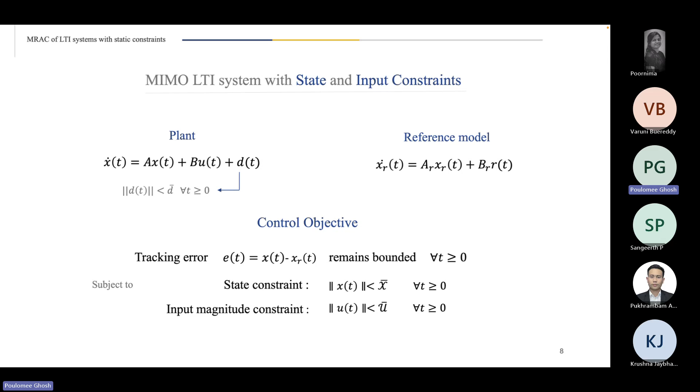Now we are assuming that the controller parameters kx and kr are bounded by kx bar and kr bar, and these are assumed to be known. This might sound conservative because we're claiming we don't know the uncertainty but know its bound, but there can be ways in real systems to know some conservative upper bound of kx bar and kr bar. We won't use these bounds in the control law itself, only in the feasibility condition, so the control law won't be conservative like robust control methods.

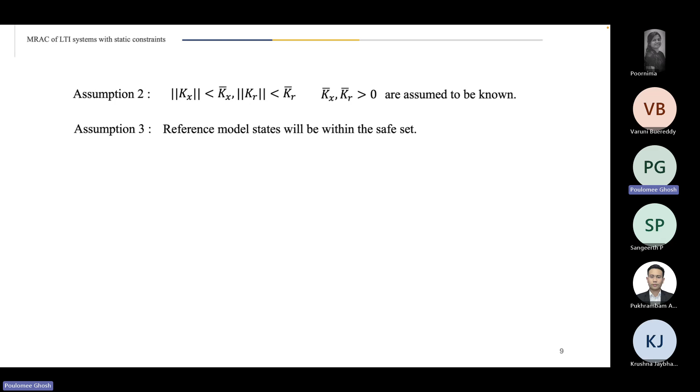Another standard assumption we make is that the reference model states will be within the safe set. That is, the reference which we want to track will also be within the safe set we are defining. So provided the norm of XR(T) is within XR bar, and here XR bar is assumed to be known.

The next assumption is that initially the error will be within the safe set. This is also a standard assumption for Barrier-Lyapunov functions or any safety certificates like CBF. We have to start within the safe set to guarantee the forward invariance of the set.

Is R of T ensuring invariance of the state, the reference model? Yes, reference. Yes, so we are assuming the reference R of T will be such that the reference model will be inside the safe set. The reference model state. So this assumption will be satisfied.

Now, provided this assumption, we can translate our constraints on the plant state to constraints on the tracking error. If our reference model is bounded by this smaller region XR bar, and we want to bound our plant state within X bar, then if we can guarantee the error will be within xi, where xi is the difference between X bar minus XR bar, then satisfying the error constraint automatically implies the state constraint is met, because my reference is always within my safe set.

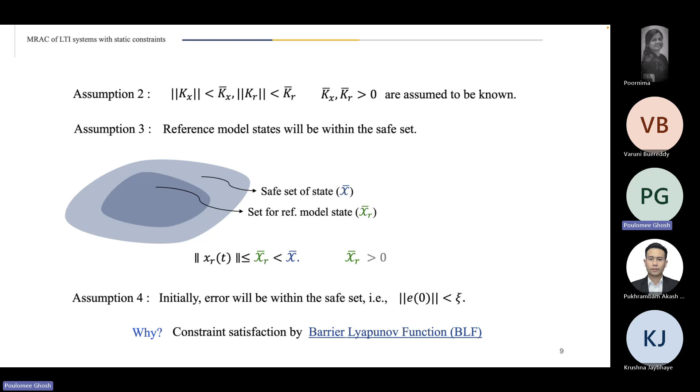Now, how does the Barrier-Lyapunov function handle constraints? It is basically a Lyapunov-like function which is zero at the origin and positive definite. As the constrained state approaches the boundary of the safe set, you can see from this expression the Barrier-Lyapunov function will approach infinity. So if we start within the safe set, which was our assumption, and if we can prove that V dot is bounded, that means V never blows up, which means our constraints are satisfied for all time.

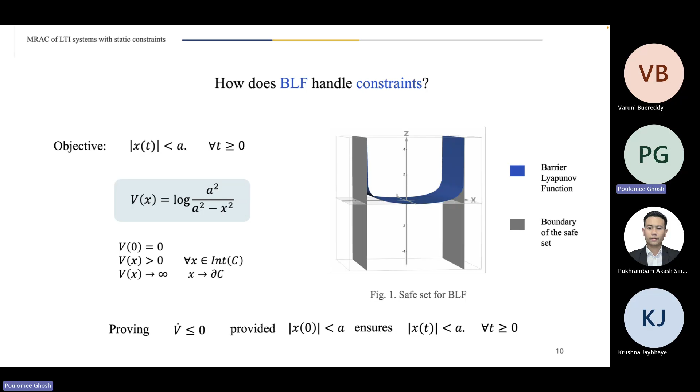So we used the BLF, which we will show later, for state constraint satisfaction. For input constraint satisfaction, we have used a saturated feedback controller. The auxiliary control input V(T) - earlier in classical MRAC we had used U(T) in this structure. Here we have considered an auxiliary control input V(T) and used a saturated feedback law such that the norm of u(t) will be within u bar, so the input constraints will be met for all time.

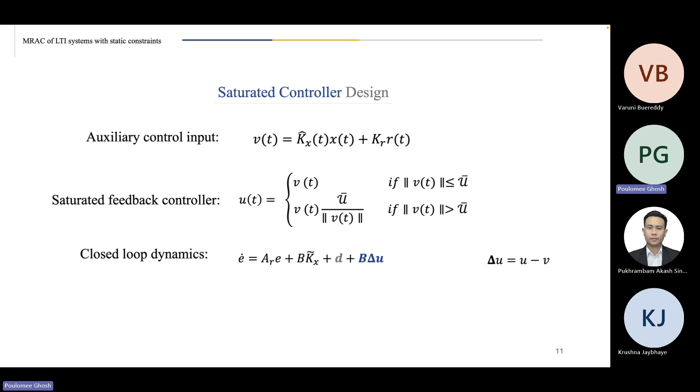But to do that, our closed loop dynamics, which earlier had only two terms, will now add two extra terms. One is D, coming due to the disturbance. Another is B delta U, coming due to the input saturation or saturation error, where delta U is the difference between U and V. So now how do we deal with this B delta U term in the Lyapunov analysis? We can consider it as a disturbance, and to mitigate its effect we need to know the bound of delta U.

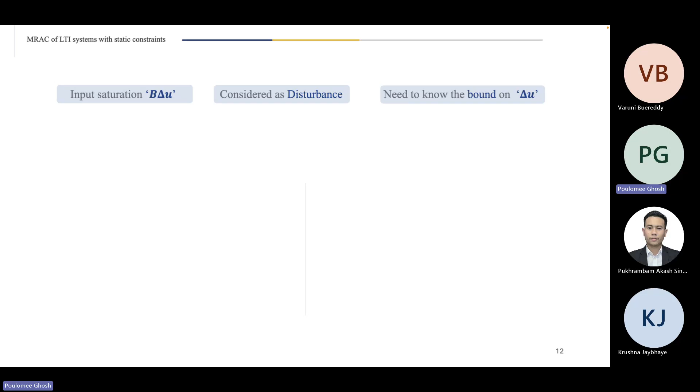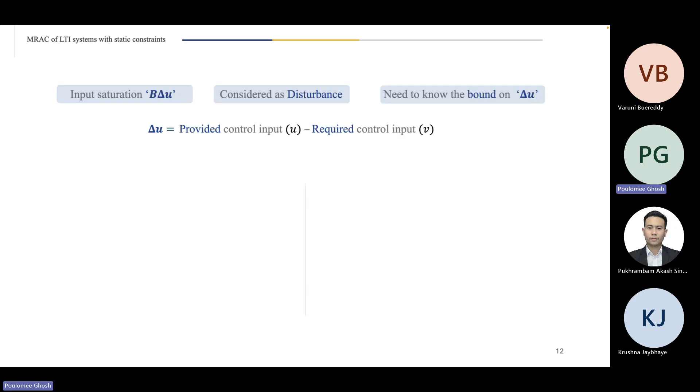So what is delta U? It is basically the difference between the provided control effort, meaning the actuator limit you have, minus a required control input, which we need to satisfy our control objective.

So there can be two cases where the required control input is less than the provided control input. There we don't have any problem. Delta U is equal to 0 and input constraint is always met.

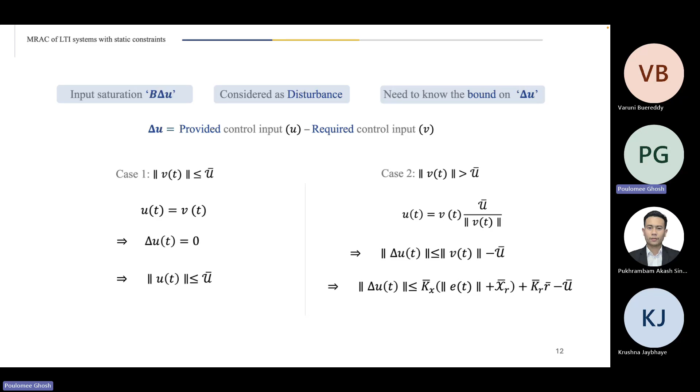So in the Lyapunov analysis, earlier we only had E transpose PE in the classical MRAC. Now instead of that, we are using a Barrier Lyapunov function. The Barrier Lyapunov function will deal with the state constraint. You can see here we have considered BLF on the error instead of state. So if the error constraint is met, we can prove that eventually the state constraint will also be met.

So in the Lyapunov analysis, again, we are having these terms B delta U and D.

So if you have this adaptive update law, we have used the projection-based adaptive update law such that the norm of Kx hat will be bounded within a compact and convex set, which is Kx bar. That is why we required that assumption that the actual controller parameter Kx is bounded and the bound is known, so that we can bound this Kx hat.

It is a disturbance. Yeah.

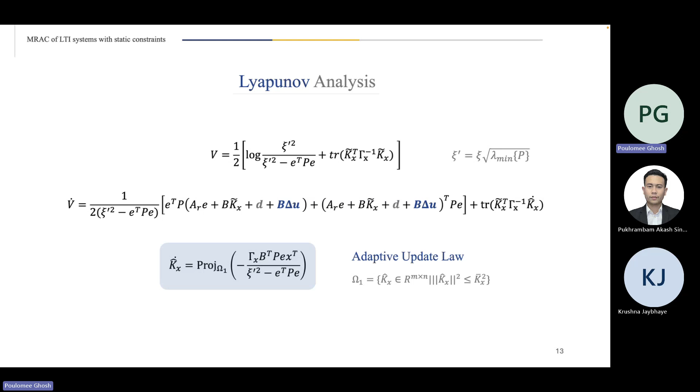So we have employed the adaptive update law and we have considered case 2 where delta U has a non-zero value. And we can prove that V dot will have this structure.

So now you can see if this highlighted region is positive, then we can get a negative semi-definite result. From there, we will have a feasibility condition which we need to meet.

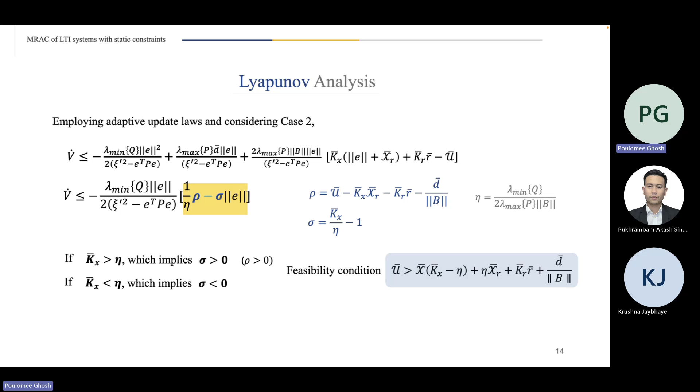So I have analyzed how this feasibility condition is coming. So basically, you can see for all cases, if this main feasibility condition is satisfied, then we can prove that V dot is negative semi-definite. I'm not going into the details of this analysis.

So you can see this is our main feasibility condition, which is a sufficient condition. That's why it might be conservative because it has this Kx bar term, which can be conservative.

So this feasibility condition is offline verifiable. We can know a priori whether our control has enough control authority to meet the state constraints and deal with the disturbances and parametric uncertainties. So it also establishes a nice relation between U bar, X bar, D bar, XR bar. So yeah.

So yeah, sir, Kx bar and Kr bar are in our hand, but the true Kx we don't know, right? So Kx bar can be a conservative upper bound of Kx. So if Kx bar value is very high, this lower bound will be very high.

That is why this feasibility condition is a sufficient condition. But since we can guarantee a priori and offline, that is the trade-off of this feasibility condition. So we are now working on how to reduce the conservatism of this condition.

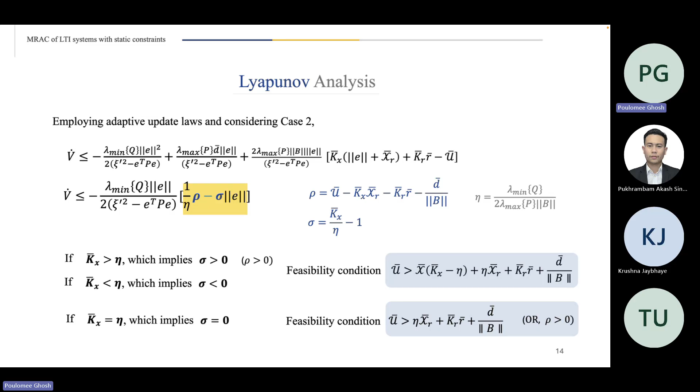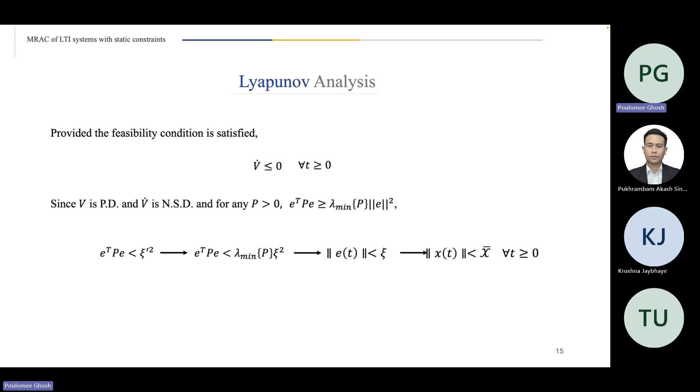So provided the feasibility condition is satisfied, we can prove a negative semi-definite result. And as I have discussed earlier, how we can guarantee from the error constraint satisfaction, we can guarantee the state constraints are eventually satisfied for all time.

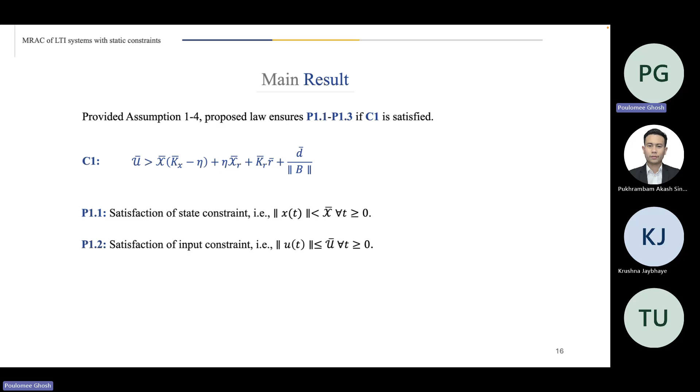So the summary of the result is, provided the assumptions hold, the proposed law ensures the state and input constraint satisfaction, and all the closed loop signals remain bounded if this offline verifiable feasibility condition is satisfied.

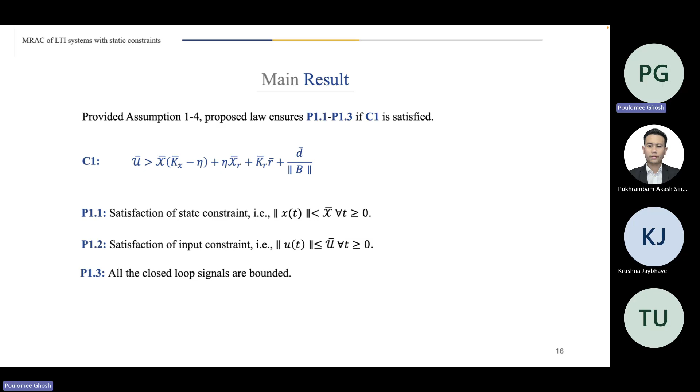Here is a small insight about the feasibility condition: if we see the feasibility condition, it is in the form U bar equals alpha 0 x bar plus beta 0. Beta 0 is always positive and alpha 0 can be positive or negative. Alpha 0 was basically Kx bar minus eta term. So we don't know the sign of alpha 0 beforehand.

Basically, U bar will have a larger lower bound. And the feasibility region will depend on the sign of alpha. If alpha is positive, the feasibility region will be smaller than if alpha is negative. Alpha negative means this term is more than kx bar, and alpha positive means kx bar is greater than this term. So basically, the uncertainty in the dynamics is more. Intuitively, it means the feasibility region will be much lower than where the uncertainty is smaller.

So that depends on, sorry, what is your question? State constraint x bar being larger means I have a larger state. Right, means I could use a smaller control for state. So U bar should be decreasing. So the relation between U bar and X bar depends on the sign of alpha 0, you can see.

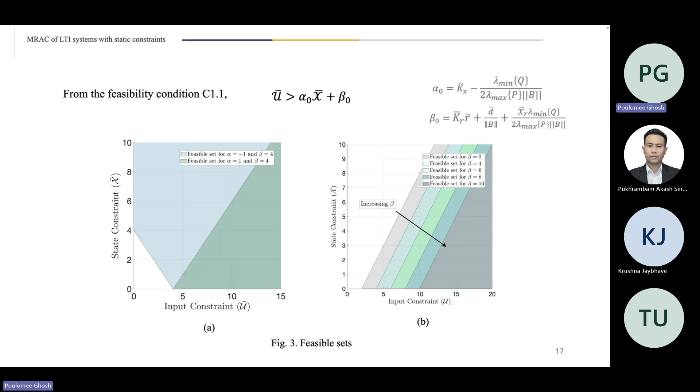So this is a brief summary of what we wanted to do. If the user provides me X bar and U bar, I will first check whether it is feasible or not. If it is infeasible, we cannot run the controller. If it is feasible, this is the controller structure. Compared to the classical MRAC, we have modified the update law. Here I have used projection, and the denominator part has the BLF based adaptive update law. And we have also used a saturated controller to deal with the input constraints.

So KR is basically, say B, KR equals BR. B is known, BR is known. Denominator, theta, xi dash, what is this? Xi dash was xi into root over lambda min P. It is basically to deal with this P. Yeah.

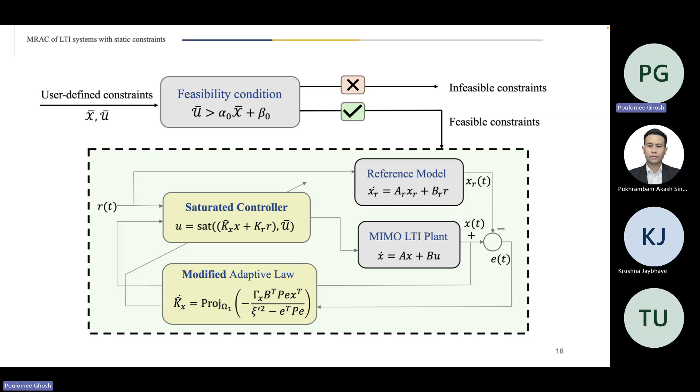Yes, so can you start from anywhere for the KX? Or do you need some sort of condition? For the KX, we can start anywhere within the KX bar set. So how will varying it, if you go larger and larger, affect your control? It cannot be larger, right? Because within the KR model, sir, if you go smaller, let's say if you start from 0 to KX bar, will this affect your controller performance? The performance can be varied, but since it is bounded within the known bound KX bar, it won't affect much.

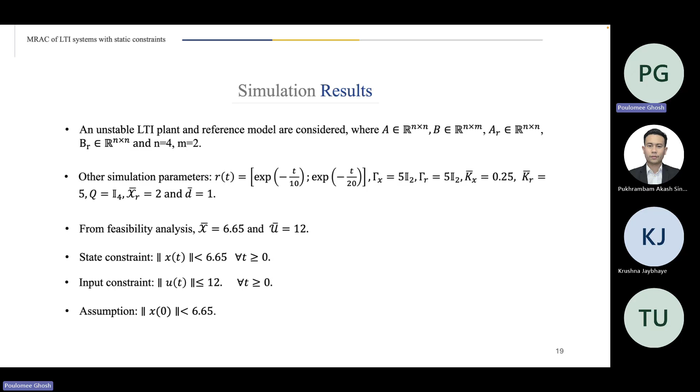So this is a very plain and simple simulation result where we have considered an unstable LTI plant and a stable reference model. We have considered the bound on X bar to be 6.65 and U bar to be 12. We also assume that initially the states start within the safe set. So basically, we show that the tracking performance, the plant state will track the reference trajectory while maintaining the state and input constraints even in the presence of disturbances. The constraints are met, but you can see the result can be conservative because we have used a fixed bound throughout our control, throughout the time.

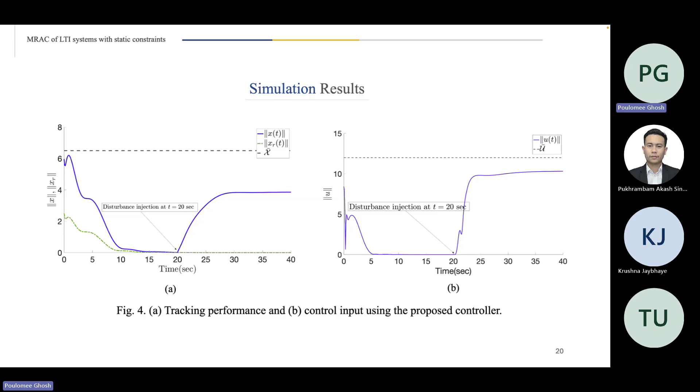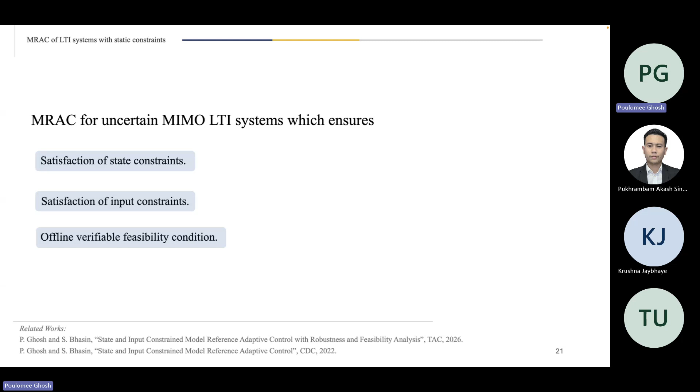So this result can be improved, and we will come to that in the next slide. So basically, to summarize this part of the work, we have considered an MRAC for uncertain MIMO LTI systems which ensures satisfaction of state and input constraints. We have also derived an offline verifiable feasibility condition. You can see in the simulation the result can be conservative because we have used a fixed bound throughout.

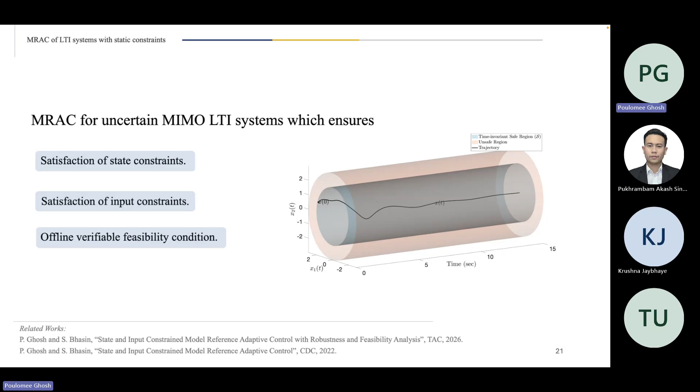So is it practical to impose this uniform constraint bound across both transient state, where error can be larger, and steady state, where error can be much lower?

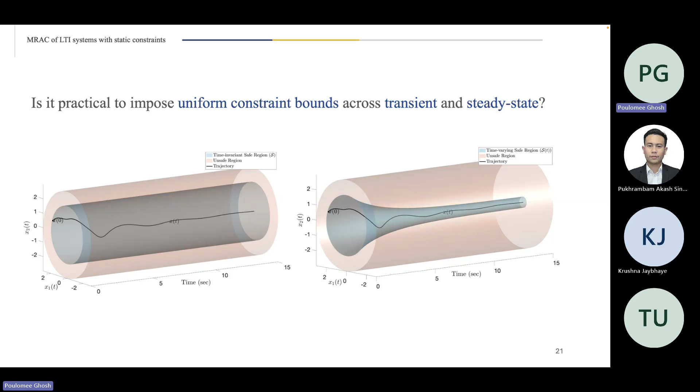A more flexible way is to consider a time varying bound. We will account for a larger error in the transient, and the error margin will shrink as we go to steady state. So there comes the concept of a time varying safe set.

So now, our problem was to get the constraint, which is solved using the barrier Lyapunov function. So you have one method for constraints, and then another method for other aspects.

What are the challenges when you combine these? What was the main challenge? While combining the methods, the combining of the state constraint part, like BLF, with MRAC was not very difficult.

The BLF can be easily integrated into the Lyapunov function. As you could see, the Lyapunov function was BLF itself. So combining MRAC with BLF is not much of a challenge, but the problem arrived when we considered input constraints.

In the presence of input constraints, we actually need to figure out how to come up with a feasibility condition such that both state and input constraints will be satisfied. The state constraint part was not much difficult, but handling input constraint along with the state constraint part, and having an offline verifiable feasibility condition, was difficult.

Are there any other techniques? As I have mentioned, the command filter approach is there, the anti-windup strategy is there. We are currently working on how to integrate these, because you can see there is conservatism in the feasibility condition. So we are working on whether other input constraint methods can be used to reduce this conservatism.

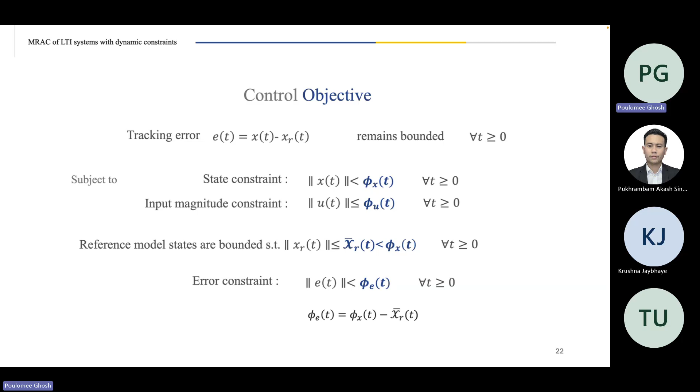Provided this assumption is satisfied, we can convert our constraints from the state to the error. So basically, if we satisfy this error constraint, it will eventually guarantee that the state constraints are satisfied.

Now we can see an extra term in the auxiliary control input, which comes in to deal with the time varying part. This is dependent on the rate of change of the time varying error constraint. And we have considered B to be full column rank, which is why this inverse exists.

The saturated feedback controller has the same structure, only we will have this extra term to deal with the time varying part. Similarly, in the closed loop error dynamics, along with the B delta U and D term, we will have this extra term.

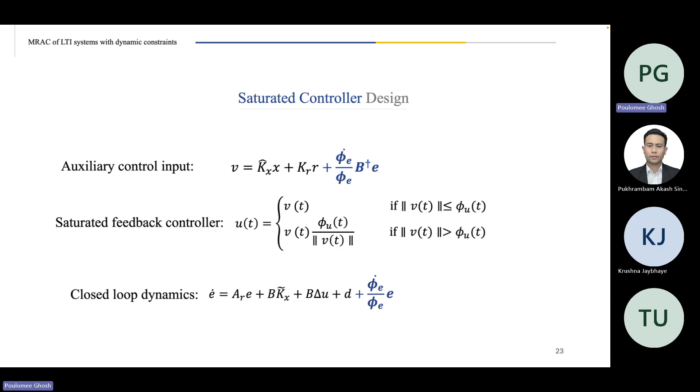So now, how to deal with this time varying constraint? For that, I have used a time varying Barrier Lyapunov function. The concept is the same: if we start within the time varying safe set, and if we can prove that V dot is bounded, it automatically satisfies the time varying constraints.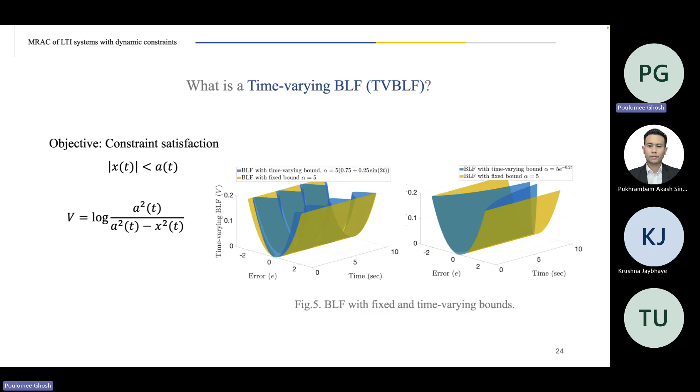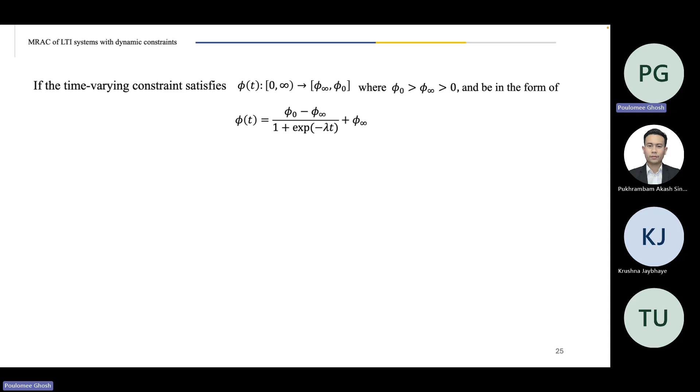Another interesting fact is that the time varying constraint can be anything - it can be a sinusoidal constraint, or an exponentially converging constraint. But if we design this time varying safe set to be an exponentially decaying function, it actually subsumes funnel based control and prescribed performance control.

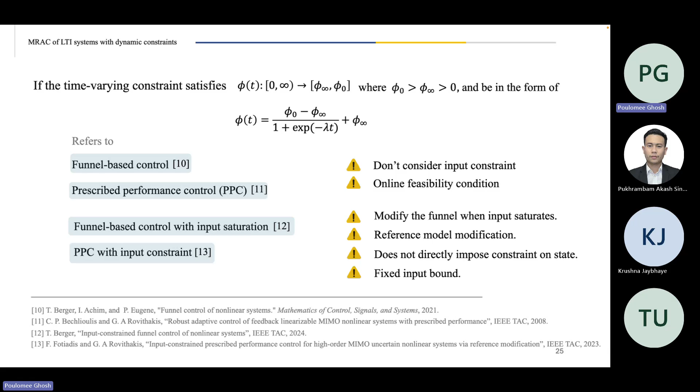So the problem with classical funnel-based control or PPC is that it typically does not consider input constraint, and it has an online verifiable feasibility condition. So we cannot know a priori whether the constraints will be feasible or not.

But there are certain works where funnel-based control and PPC use input constraints. The problem with those methods is that for funnel-based control with input saturation, whenever the saturation is there, the funnel itself gets modified to account for it. Similarly, for PPC, if the input constraint is activated, the reference model gets modified. So if we don't want to modify our nominal reference model or the funnel, what we prescribe for our safe set, we cannot use these methods. And it does not directly impose constraints, the PPC with input constraint.

It considers that the tracking error will converge within a time varying safe set, so it does not directly impose constraints on the plant state. And they consider the fixed input bound. So our method will be a more general tool where we consider time varying constraints on both plant state and control input.

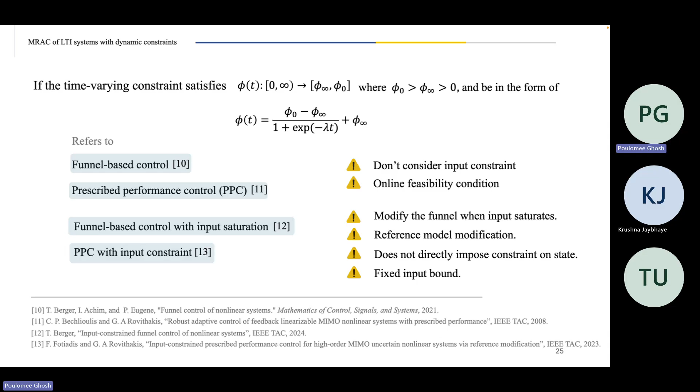So the Lyapunov analysis will be similar, I'm not repeating all these things. We are again using a projection based update law to satisfy the error constraints and eventually the state constraints.

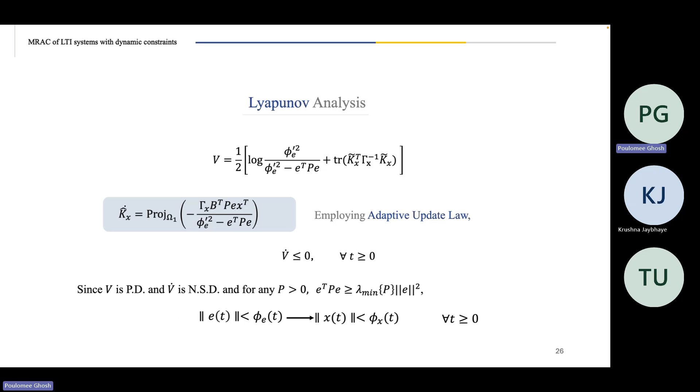And this is the feasibility condition we have for the time varying constraints. You can see this extra term is there in the time varying part, where the feasibility condition, the control authority we have, is dependent on the rate of change of the safe set that we define. It also establishes a similar kind of interrelationship between the control authority and the time varying state constraint. And if these time varying constraints are fixed, this becomes a special case, like the fixed bound result which I presented earlier.

So if this feasibility condition is satisfied and all the assumptions hold, we can guarantee satisfaction of state and input constraints, and all the closed loop signals will be bounded.

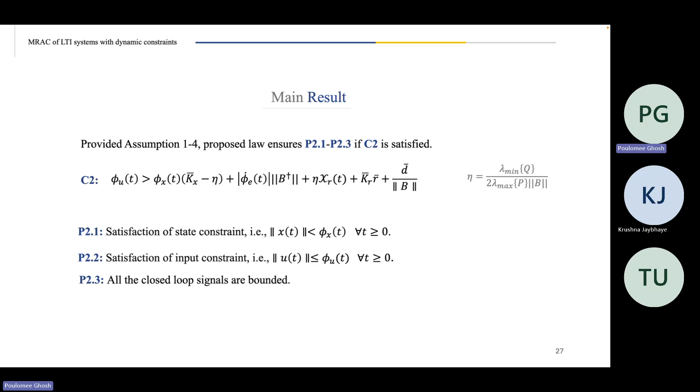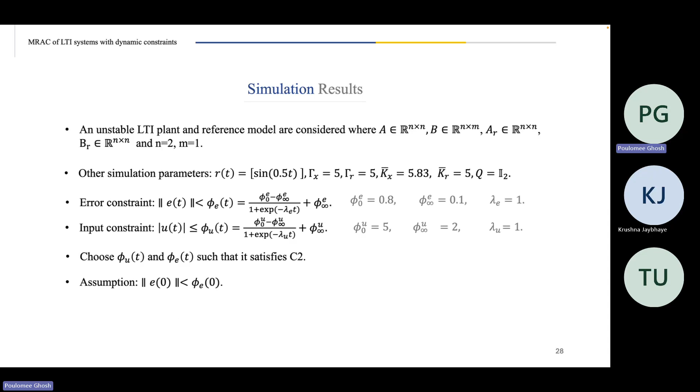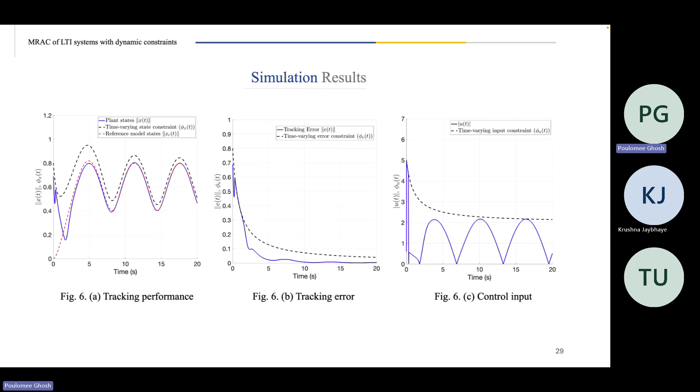So to summarize, we have developed an MRAC framework for MIMO LTI systems to consider time varying state and input constraints. And here also we have derived an offline verifiable feasibility condition in the presence of parametric uncertainties and disturbances.

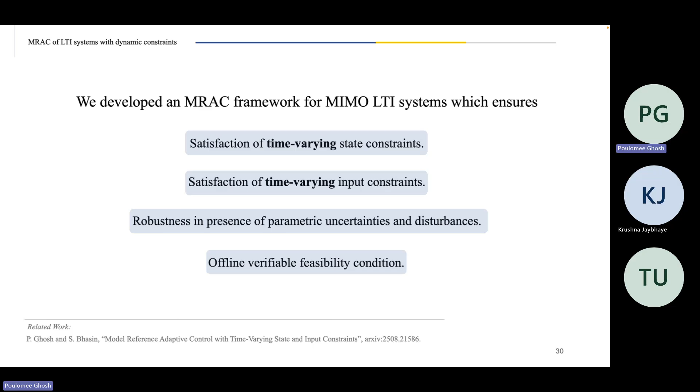Now I have extended this framework to uncertain EL systems. I will not go much deeper or into detail in this part. The framework which we developed for MRAC is just extended for this Euler-Lagrange plant. Here also I have considered this disturbance, the bounded disturbance in the EL plant, so the disturbance in the input channel.

Yes, yes. So, sorry, here the disturbance can be unmatched, right? So because there's not - can the disturbance be in states Q and Q dot? I have considered only time dependent disturbance, not state dependent disturbances.

We are considering this M, VQ, VM, GR, FD as unknown - this is external disturbance, so the uncertainty is different. The control objective is that the states Q will track QD, and the error between Q and QD, and Q dot and QD dot, will be bounded. We are not ensuring asymptotic tracking.

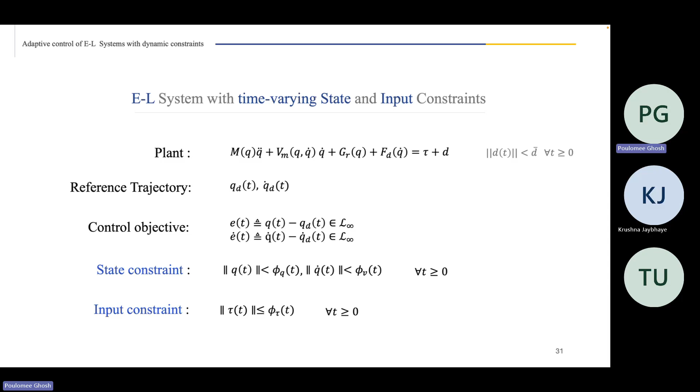And we are considering the state constraints on both position and velocity, as well as the torque. Here this phi - first I have shown the time varying case, and later I will just show how this time varying case will be a more general case for the fixed bound case. Similarly, I have used an auxiliary control input and a saturated feedback controller to have a closed loop dynamics like this.

Here this y is the regressor and theta is an unknown parameter vector, so y theta can have this structure like this. I have used the analogy of the filter tracking error - R is the filter tracking error here, so R is basically E dot plus alpha E.

Since we have constraints on both E and E dot, instead of considering separate constraints, we are having a single constraint on R. So we will show if the bound on R is satisfied, the bound on E and E dot, and subsequently the bound on Q and Q dot will also be satisfied.

So there I will have later a parameter update law. And what is the difference between theta hat and theta tilde? Theta tilde is the estimation error, which is the difference between theta hat and theta.

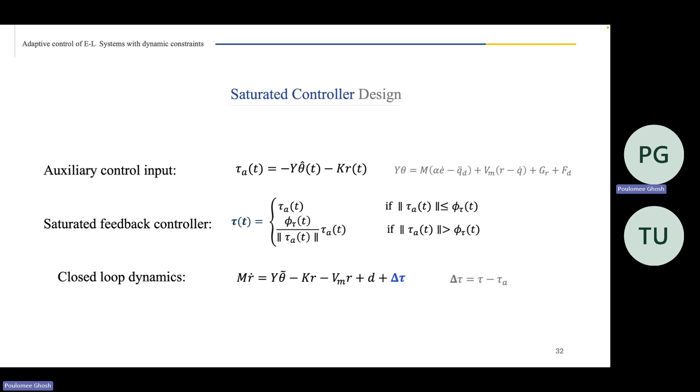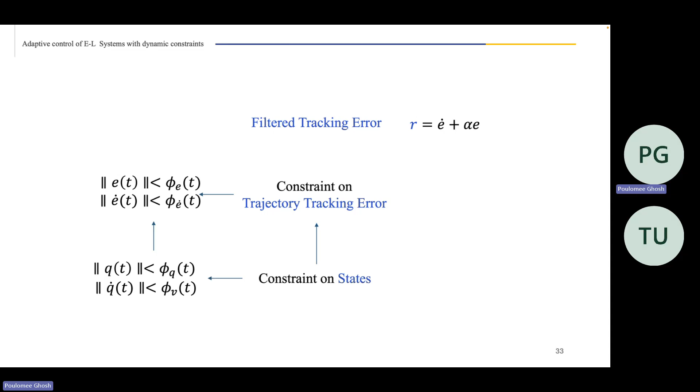So here I've explained that I had earlier constraints on our plant state. These are our original constraints. And we are having the assumption that our reference model is within the safe set. We are converting the constraints on the tracking error.

And from there, we will convert the constraint further into the filter tracking error R, which is basically defined as E dot plus alpha E. Alpha is a constant.

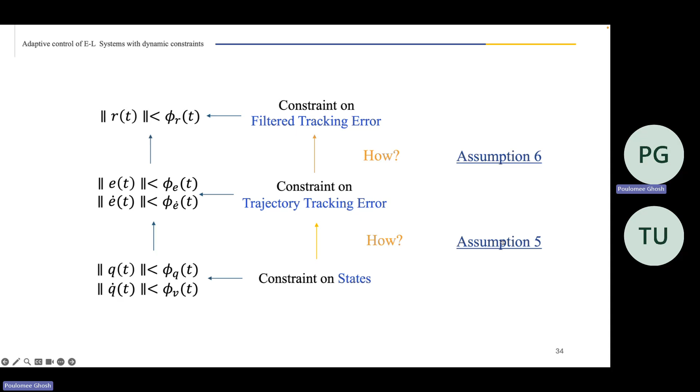So how are we converting the constraints from state to the trajectory tracking error? This is through that assumption that the reference is within the safe set. And the next assumption is how we are converting constraints on the trajectory tracking error to filter tracking error. So that is the assumption.

It's kind of a filter, like the structure you can see R is equal to E dot plus alpha E. Sliding mode kind of thing it is coming, when you are getting your position and velocity as a single velocity. But why filter? You are fitting the position values to your velocity. The structure of the dynamics is kind of a filter.

So assumption 6 is basically to convert the constraints on the trajectory tracking error to filter tracking error. We have certain assumptions on the initial value of E and R to convert, and kappa, which will be lower. So if these assumptions are satisfied, we can basically convert our constraints from E and E dot to R.

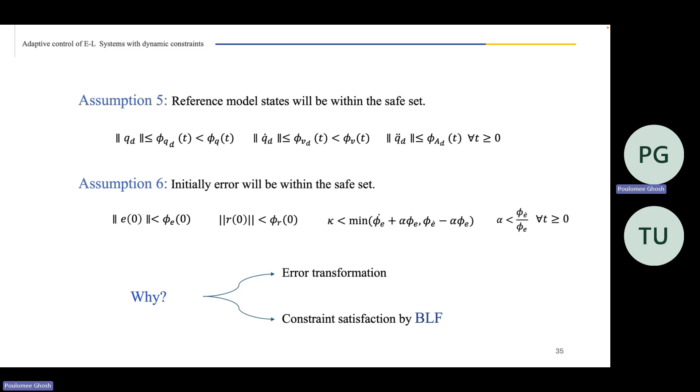And why is this needed? First, because of the error transformation, and second, because this assumption is needed to satisfy the constraint by using BLF. So in BLF, we need to have our error state to be within the safe set. So satisfying the constraint on the filter tracking error will satisfy the constraint on the trajectory tracking error, and this will imply the state constraint satisfaction.

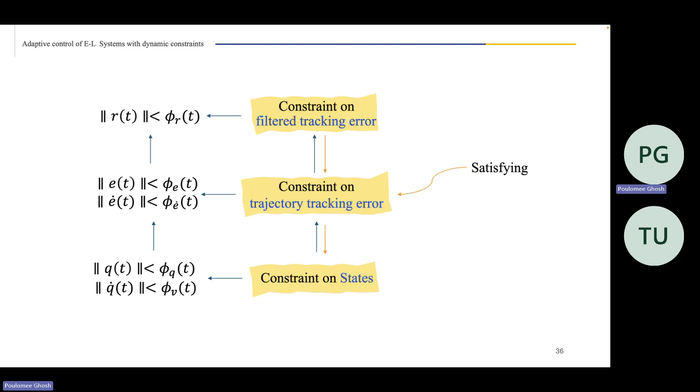So in the Lyapunov analysis, we have considered a positive definite Lyapunov function, and it also has a similar structure. Like in the denominator, we have terms of BLF, and provided this adaptive update law is satisfied, here also I have used a projection based adaptive update law. I have assumed that the unknown parameter vector theta, so the norm of theta is bounded by theta bar, and we have assumed theta bar is known.

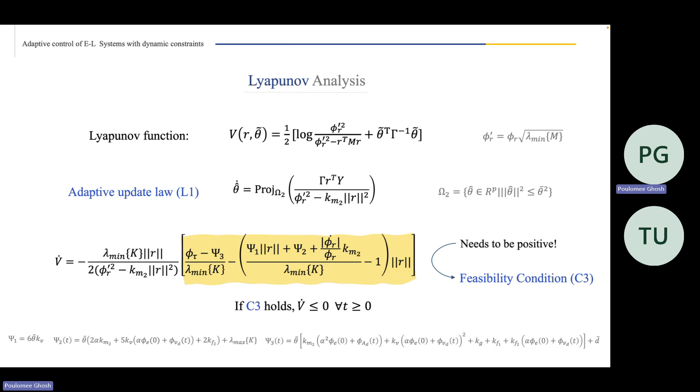So if we use this adaptive update law, we will have the structure of V dot. This will eventually become a feasibility condition, and if this feasibility condition is satisfied, then V dot will be negative semi-definite.

Next statement. If this offline verifiable sufficient feasibility condition is met, then we can say that state and input are within time varying envelopes, and all the closed loop signals will remain bounded.

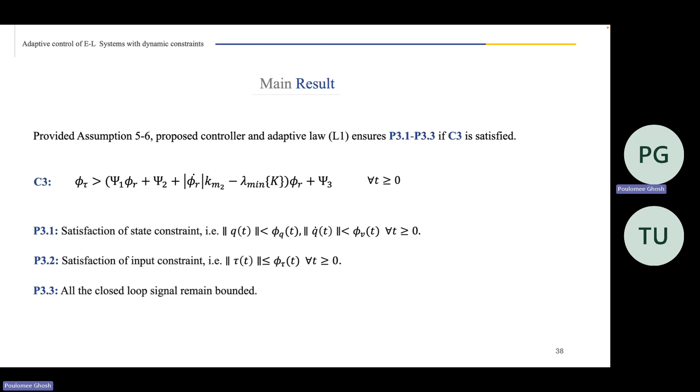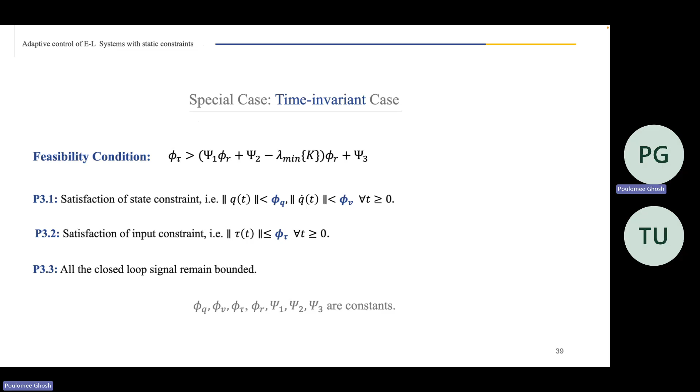For a special case, the time invariant case, this term phi r dot will be 0. And we will have this condition where we can guarantee that state and input will be within a fixed bound. Here phi q, phi v, and phi tau are not time varying.

So we have verified this result in a 2-DoF helicopter model. We have considered constraints on the position error, velocity error, and the torque. These are the time varying envelopes which we have considered, and we will show that our errors and the torque will be within these envelopes for all time.

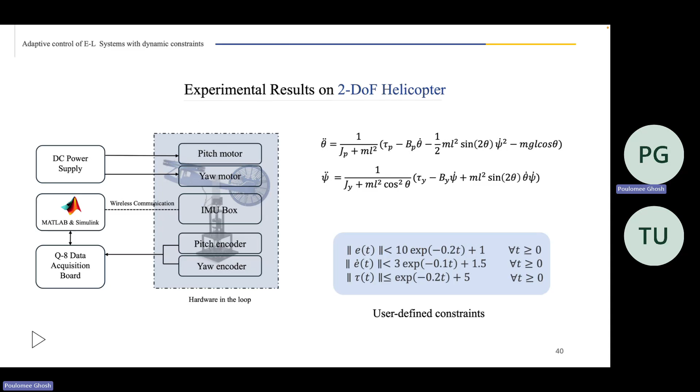You can see the tracking performance, and in pitch and yaw there is some noise due to some noisy measurements here.

So this is an experimental result, not a simulation result.

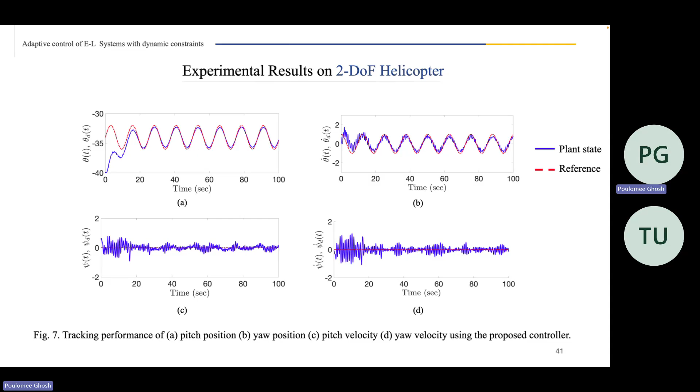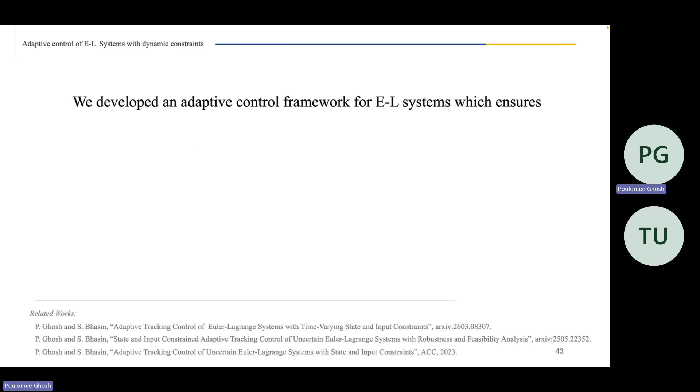So we developed an adaptive control framework for EL systems, which ensures time varying state and input constraint satisfaction in presence of parametric uncertainties and disturbances. We have also derived an offline verifiable feasibility condition, which certifies the existence of a control policy for any given state and input constraints.

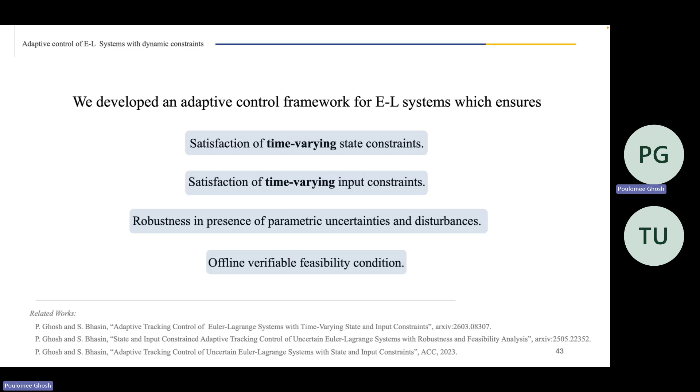So that was a part of my research. We have also extended this to consider constraints on both input magnitude and input rate, but I have not included that part here.

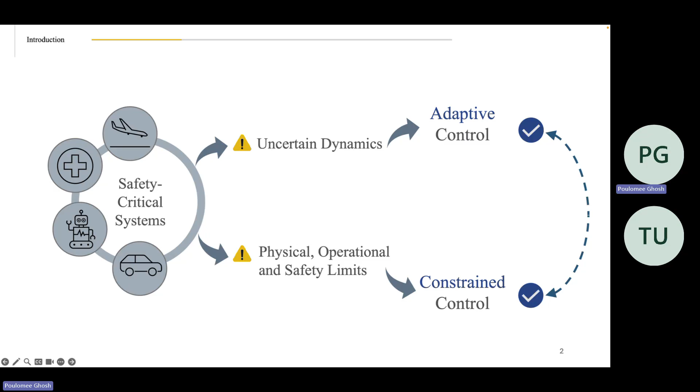Then go to slide number 4. I actually had a doubt, I think it was slide 2. This one or this one? No, go ahead.

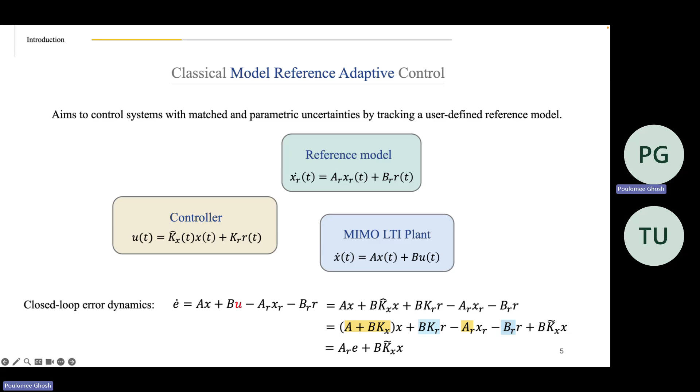Where you are given the control, the MRAC. Yeah, this, but it's K tilde, so K x tilde, right? This one - Kx tilde is basically the parameter estimation error, same as theta tilde. So the actual parameter is Kx, and we are estimating Kx hat. It is basically the difference between the estimation and the actual parameter.

So both Kx and Kx hat are known? No, Kx is unknown to us. Kx hat is known to us. We are estimating Kx. So what's Kx? Here in the model, I see Kx. So Kx is basically the controller parameter.

So in the control law, if you consider both A and B are known, then we will have Kx x plus Kr r, right? And we will use this in the closed loop dynamics, and we will have a nice term AR, and will not have this term B Kx tilde x. But since Kx is not known to us, we are using an estimate Kx hat. Kx is basically a controller parameter which will solve this matching condition, A plus B Kx equals AR. From there, you can have the actual value of Kx if A and B are known.